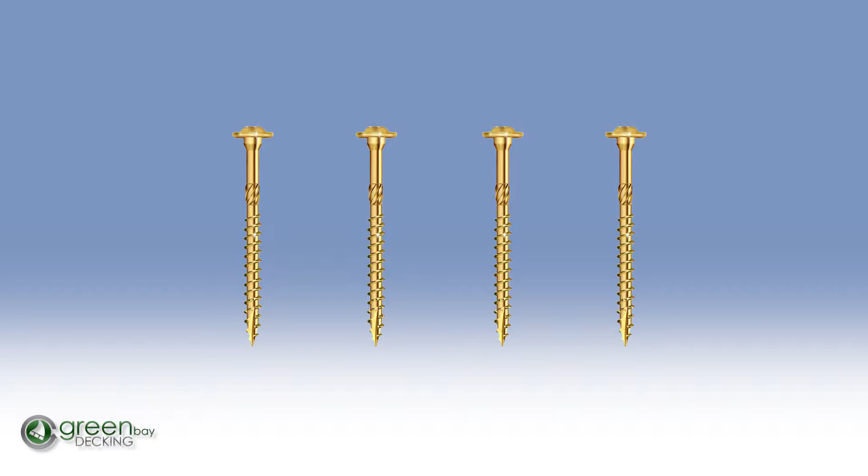We recommend the following tools: appropriate fasteners for mounting posts to deck, miter saw with carbide-tipped non-ferrous blade, cordless drill, tape measure, level, power cords, drop sheets, and safety glasses, 3/16" drill bit, 6" No. 2 square drive bit.

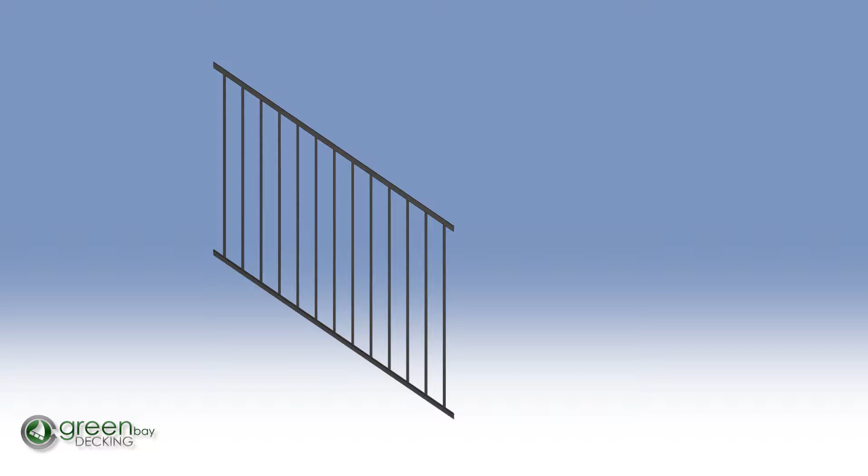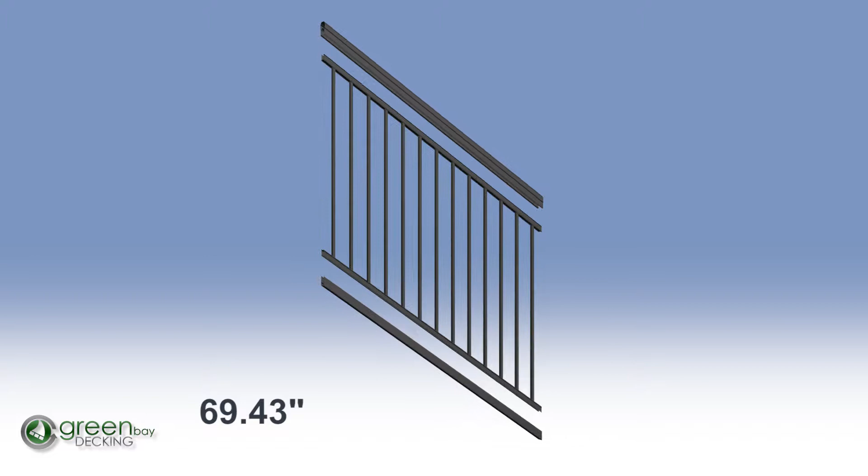Stair panel kits include pre-assembled aluminum stair panel, top and bottom rail snap covers, hardware to attach the stair panel to 2 posts, and an install guide. Stair panels are available in 6 and 8 foot lengths and 36 and 42-inch heights. The actual length of 6-foot panels is 69.43 inches, and 8-foot panels are 91.31 inches.

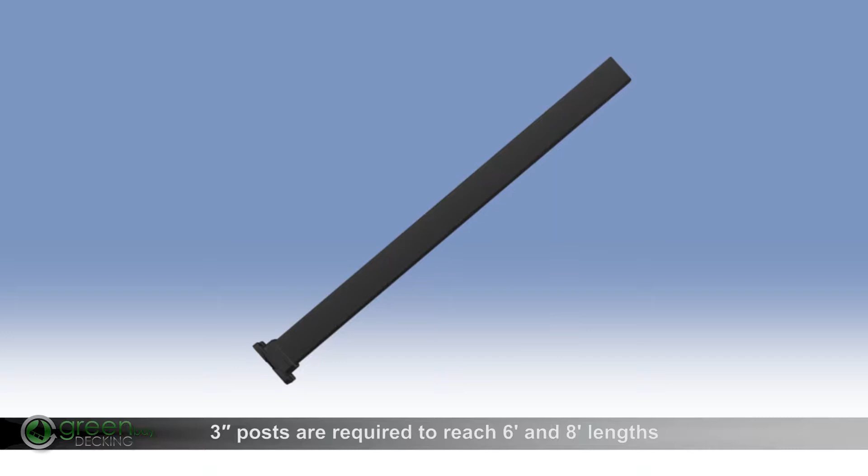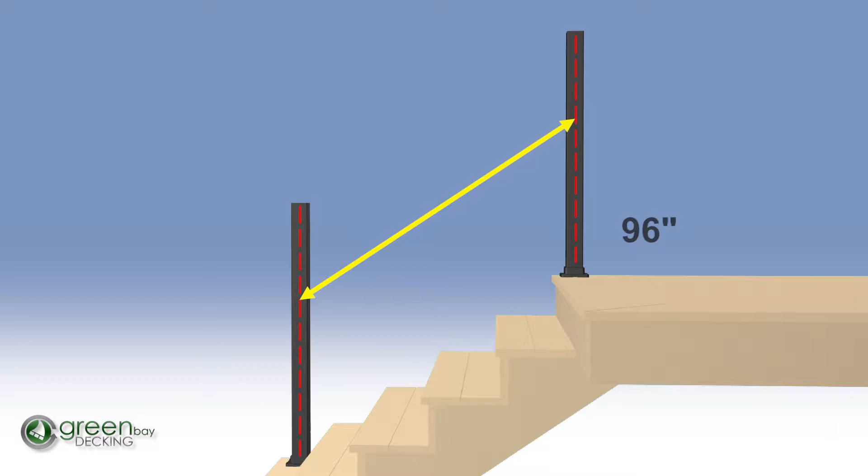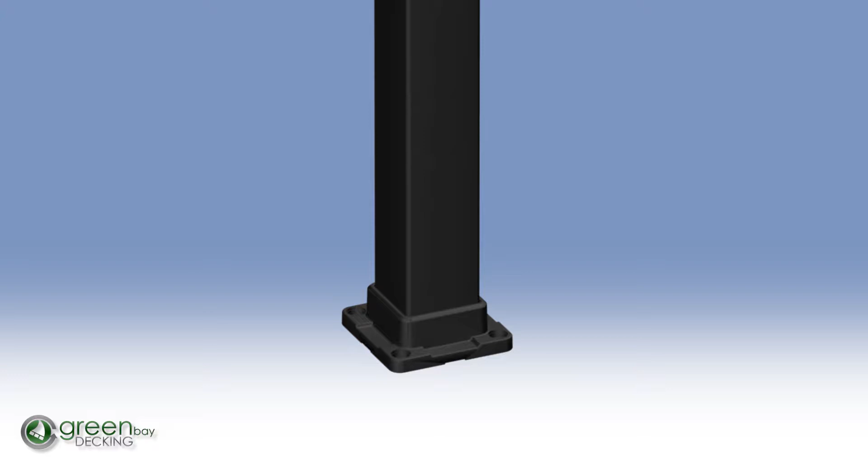3-inch posts are required to reach 6-foot and 8-foot lengths. Stair railing panels are shipped at a 37-degree angle, and panels are adjustable. Maximum post spans on stair railing application is 96 inches on center. Additional posts are required on any stair application more than 8 feet in length. Each post kit includes an aluminum post tube with attached base plate, post cap, and 2-piece base plate covers.

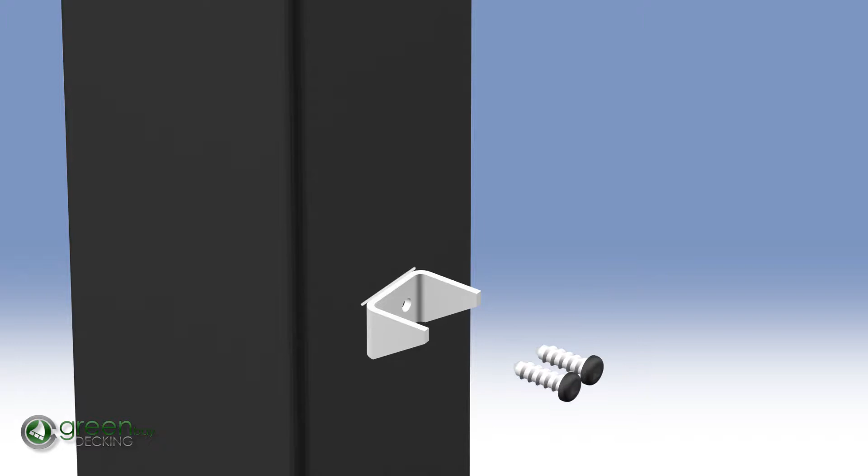Let's get started. First, we'll plan out and install the 3-inch posts. Note: rail clip jigs are only used for level panels and do not work for proper stair panel installation. For stair applications, lower rail clip placement will be measured after posts are installed. Install proper post blocking under each screw location. With 3/16" drill bit, pre-drill through deck boards and into blocking. For residential wood decks, secure posts to deck.

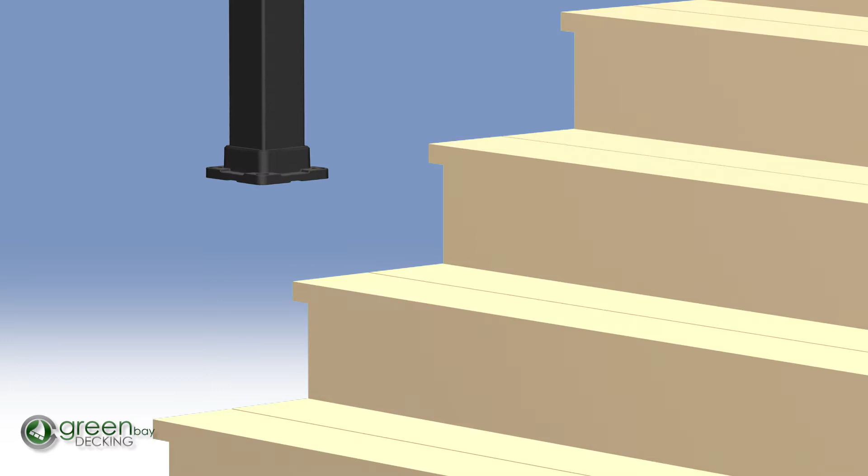Do not install post caps and 2-piece base plate covers until all panels are installed. Temporarily install end stair posts so rail centerline aligns with top stair posts installed. Recommended post installation locations are as shown.

Now we'll install the pre-assembled stair panels. Position the stair railing panel along 3-inch top stair post and temporarily installed 3-inch bottom post. Position the panel approximately 1.5 inches above stair nosing. A helpful tip is to lay a 2x4 board flat on the nose of stair treads. This will allow enough room for installation of bottom snap.

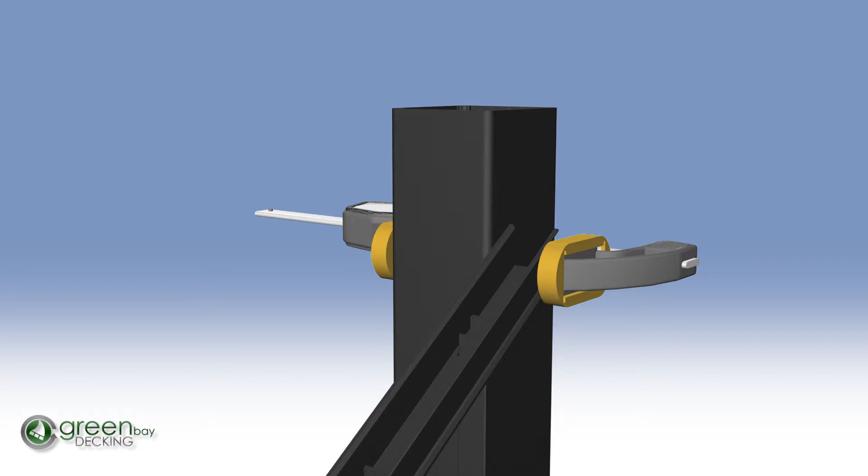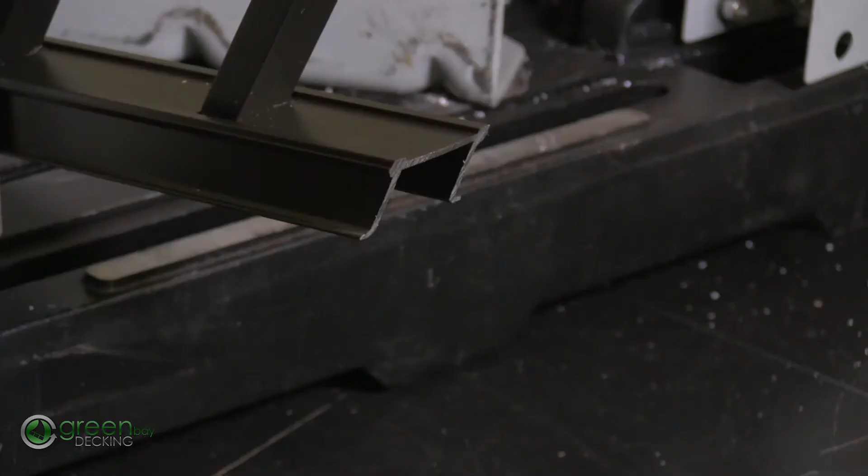Clamp the stair panel against top and bottom 3-inch posts and mark the stair channels at all 4 locations with a sharp No. 2 pencil. Remove the clamps and cut the stair panel at all 4 locations, taking care to match the appropriate stair angle. Use of miter saw with a sharp non-ferrous blade is recommended. Clean cut areas and apply touch-up paint on all exposed ends.

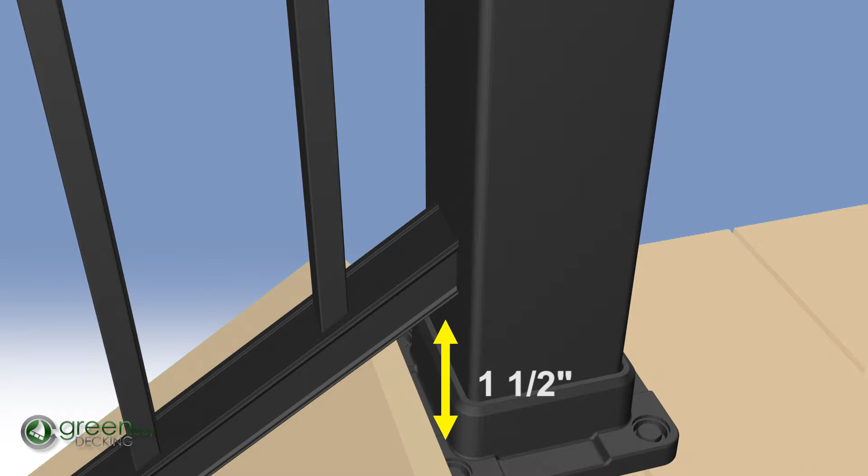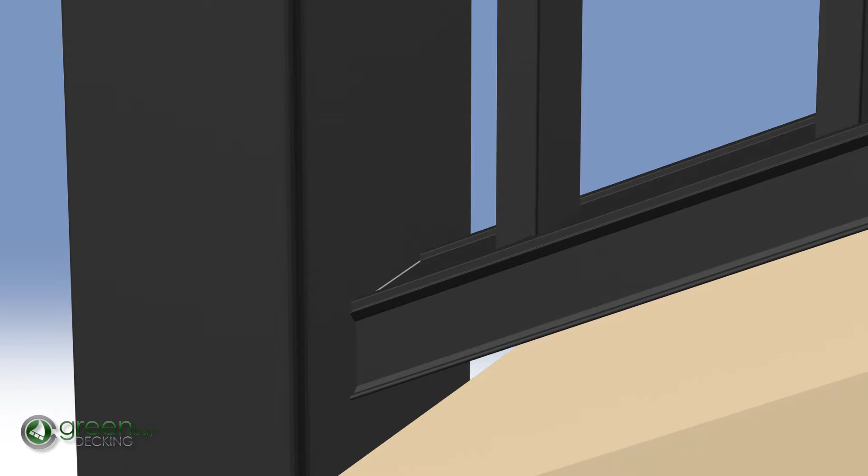After the stair panel has been cut to proper size and angle, place the panel on a 2x4 board or hold 1.5 inches above stair nosing between the 3-inch posts. Use a sharp No. 2 pencil to draw a line across the top of the lower baluster channel in 2 places. Remove the panel and bottom post, then attach the stair panel attach clips at marked location and fasten with No. 8 by 3/4 inch Tek screws.

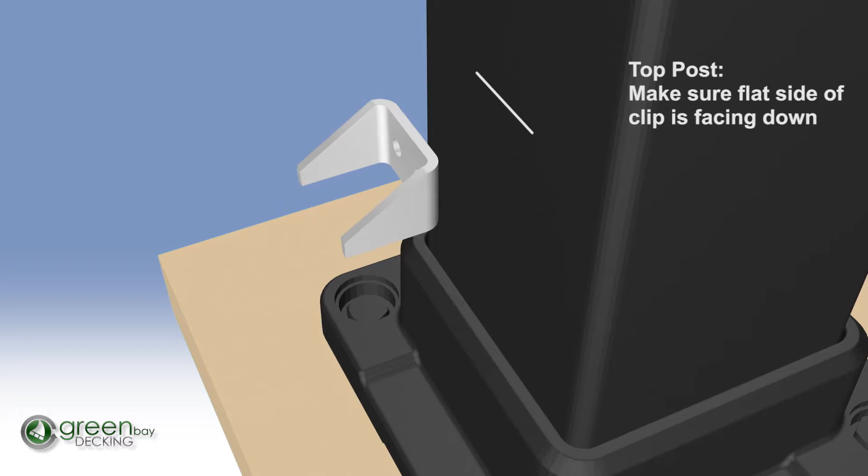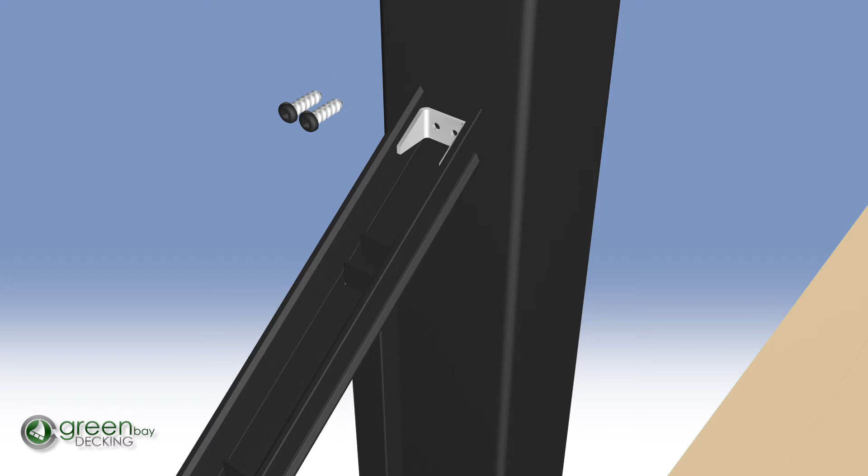Once the stair panel attach clips have been installed, reattach the lower 3-inch post to the bottom step or landing. Then place the stair panel onto the lower stair panel attach clips. After the lower extrusion is fully seated on the lower clips, insert the stair panel attach clips into upper extrusion. Secure the attach clips to the post with 2 No. 8 by 3/4 inch Tek screws.

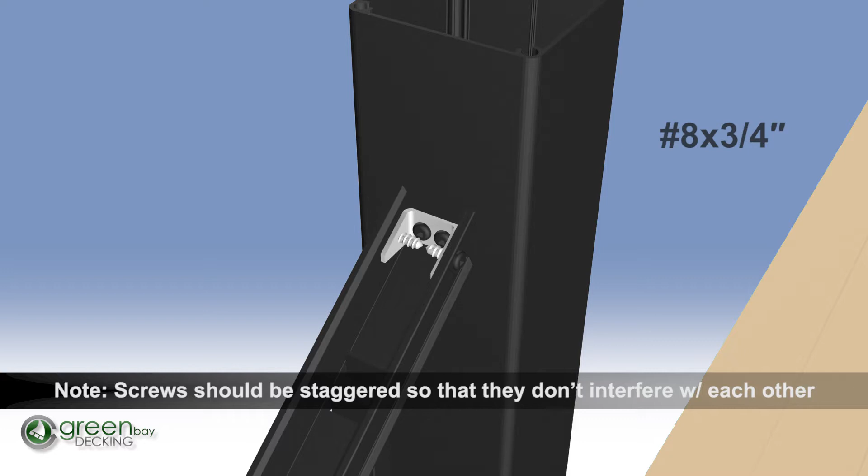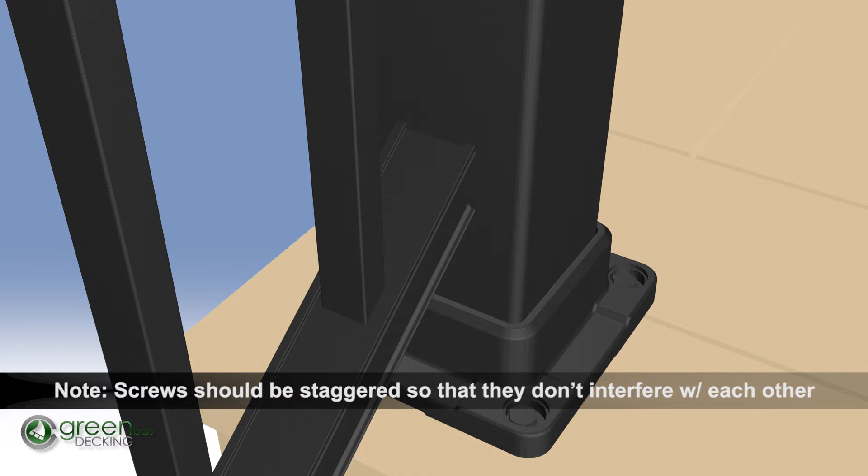Then secure the upper extrusion to the stair panel attach clip with 2 No. 8 by 3/4 inch Tek screws. Repeat this same procedure for the upper extrusion of the lower post. When upper extrusion is secured to both attach clips, secure lower extrusion to lower stair clips with 2 No. 8 by 3/4 inch Tek screws on both posts.

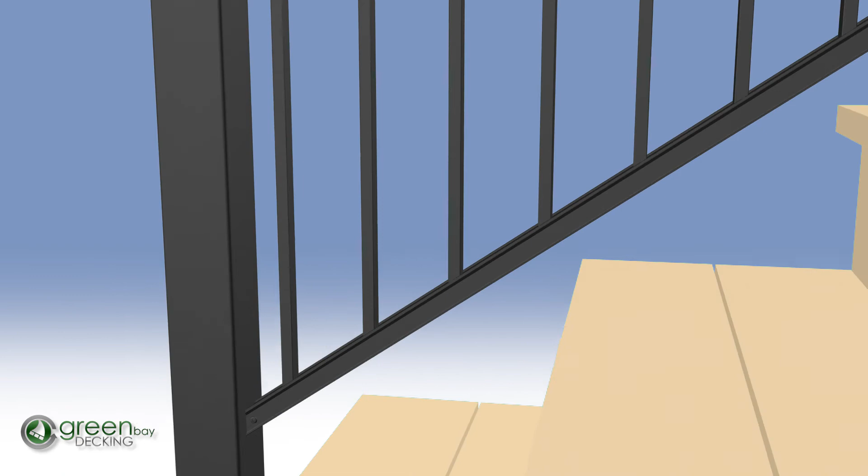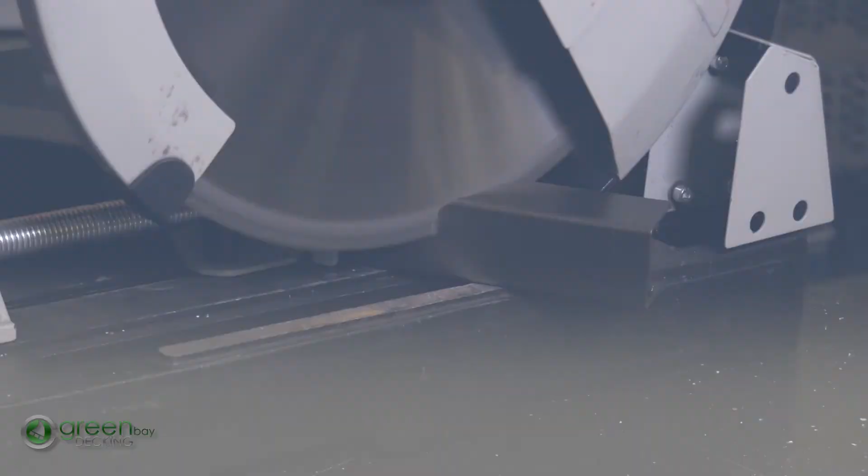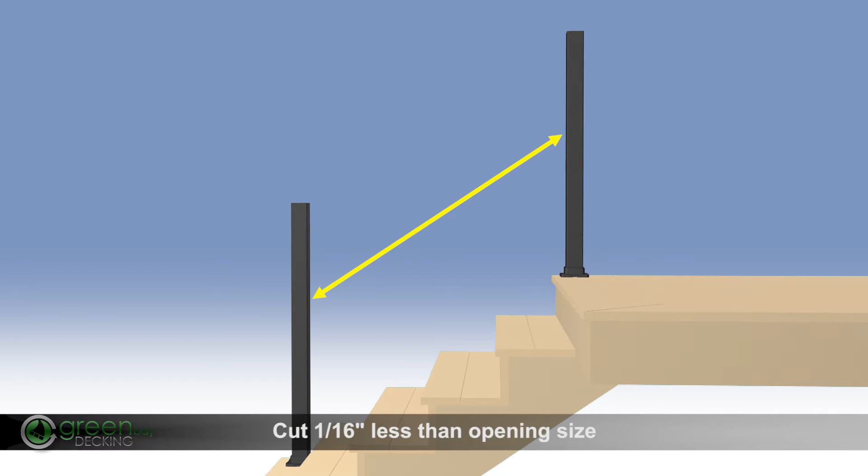Following the same angle as the secured stair panel, clamp or hold the top and bottom rail snaps against 3-inch posts. Using a sharp No. 2 pencil, mark them at all 4 locations. Remove the clamps and cut the top and bottom rail snaps at all 4 locations, taking care to match the appropriate stair angle. Use of miter saw with a sharp non-ferrous blade is recommended. Cut 1/16 inch less than opening size. Clean cut areas and apply touch-up paint on exposed ends.

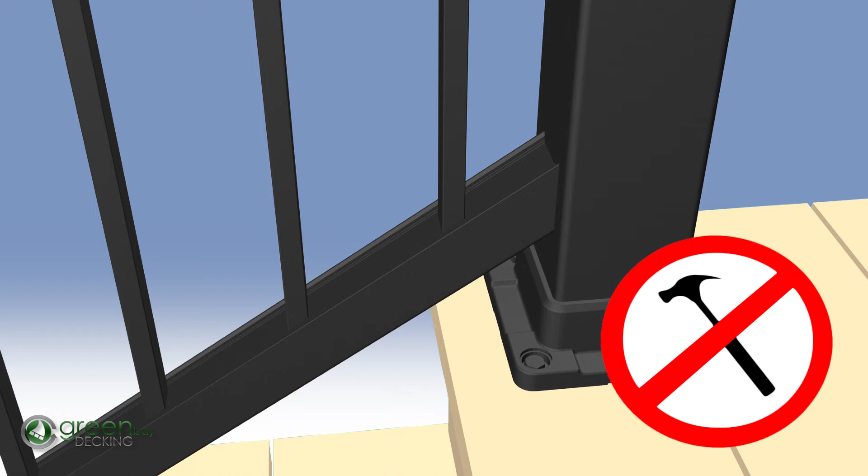Snap each rail snap over the corresponding rail channel until properly seated. The snap cover should snap firmly onto the aluminum railing channels. Do not use a hammer. The top rails will snap by applying pressure from one end to the other. If you're having issues snapping on the covers, check the clips to ensure that they are bottomed out into the aluminum railing channels.

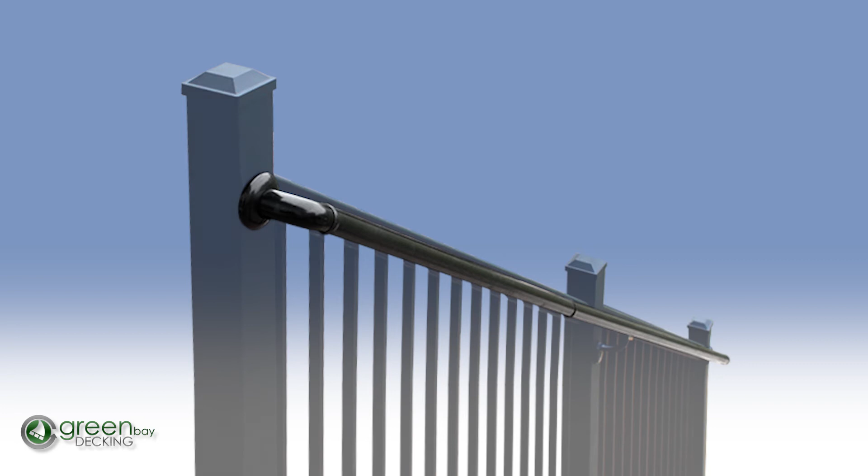ADA handrails may be required for residential deck installations. Check with your local building code official for more information. Maximum recommended span between posts is 6 foot on center. See separate ADA handrail installation instructions for configurations. Lastly, install the post caps and 2-piece base plate covers on all posts.